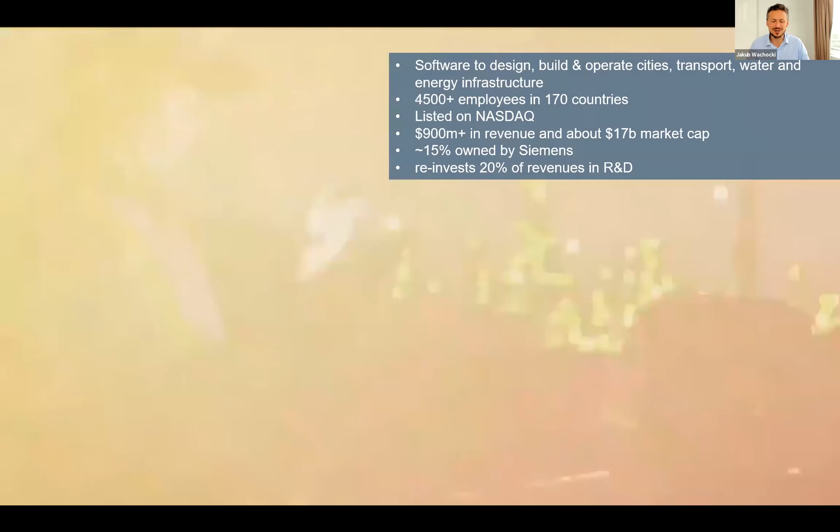So a bit about myself. I'm based in Singapore, relocated here about 2 years ago. And I've been involved in a number of activities here, also with some of the government agencies, and now we are providing something that we call Success Advisory. If you don't know Bentley, we provide software solutions to engineers, architects who design, build, and also operate the infrastructure, which is sustainable and smart. We have about 4,500 employees across 170 countries.

For those who are in Singapore, I'm sure you are familiar with some of the examples with this architecture. Of course, Marina Bay Sands. As an example of a project we're involved in, we've actually been providing solutions to design the ArtScience Museum here, but also the structure for the Marina Bay Sands, also the bridge, but also the geotechnical information and simulation below ground.

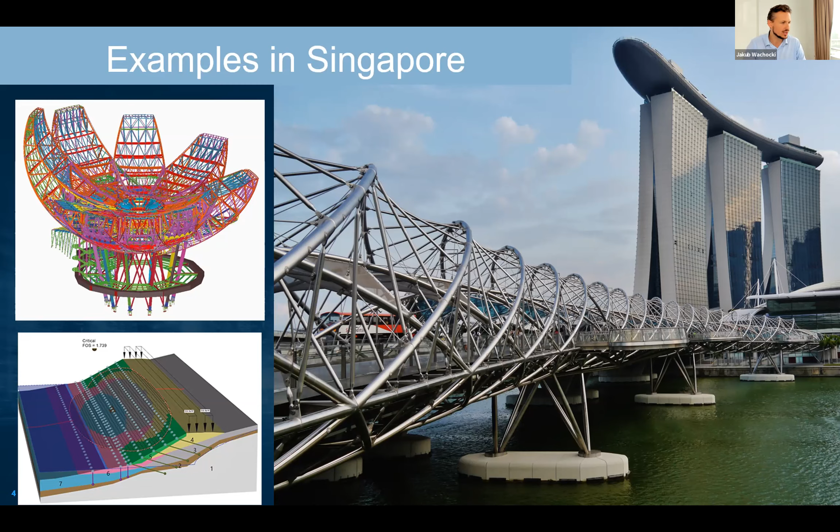So giving a bit of a context, I'm sure you personally feel that there is a certain trend that we are experiencing. More and more people are actually moving towards the cities. And therefore, there is a big pressure on the cities, right? Singapore, of course, has limited space, can go up and down, and up to 70% of people will actually live in cities going forward. But we also see that the cities are becoming digital. And today I'm going to be focusing less on the cities context, but more towards the infrastructure assets.

So what we see is that our future is, of course, smart, and I will be defining what it means precisely, but also our future is more and more open, and this is part of our strategy. We understand that, especially for the big infrastructure owners, where you're trying to combine disparate systems, disparate data sources together, whether these are IoT sensors, engineering data coming from designers, contractors, any other services, you need an open system to be able to actually harvest the data to the fullest, and also remove that lock-in that is quite a concern for many owners.

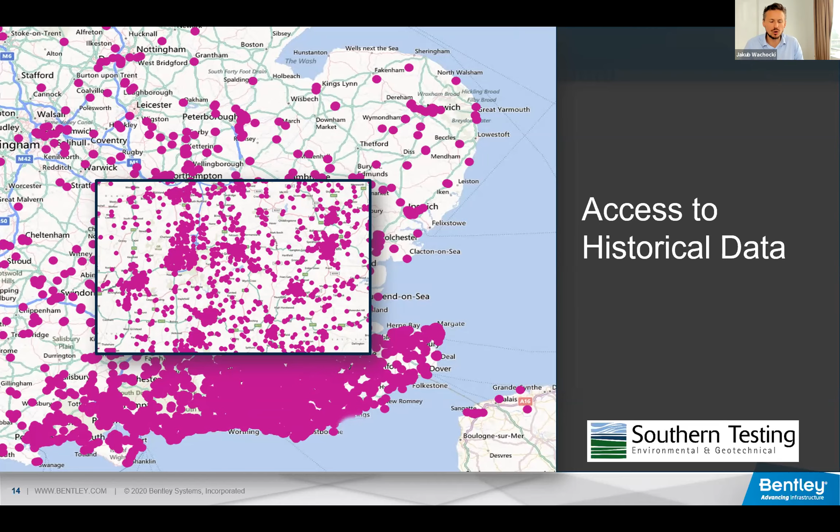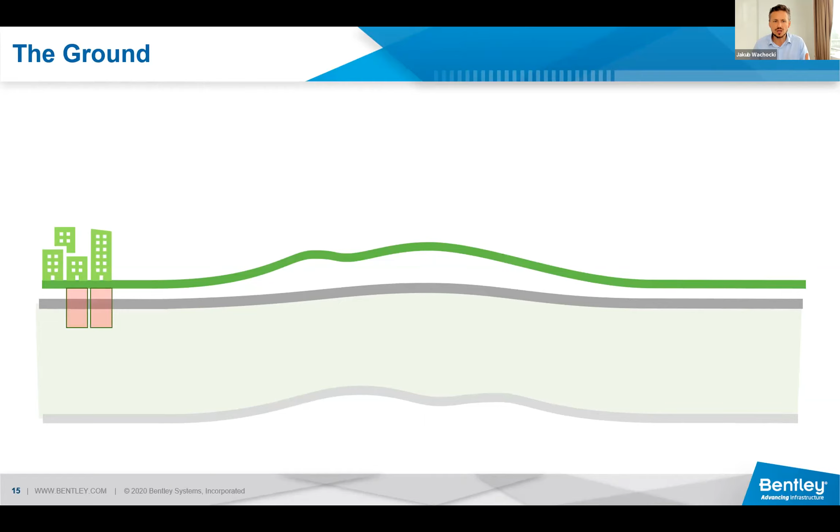Another thing to consider is that it's not just about the overground. Typically when we think about infrastructure, it might be we build a road, a rail, maybe a station, an airport, whatever it is. But what we must realize is that it's about connecting different systems that are coming from the underground assets as well. So it's both underground and overground assets because especially underground, the ground itself is being shared across the participants.

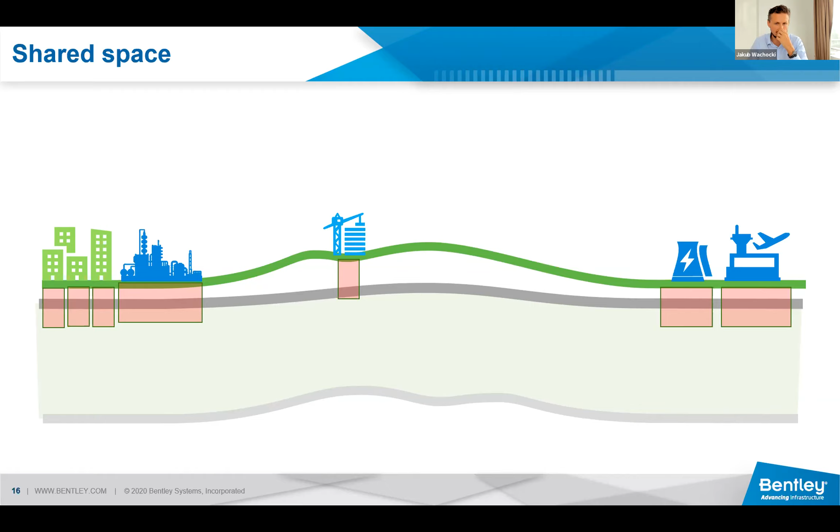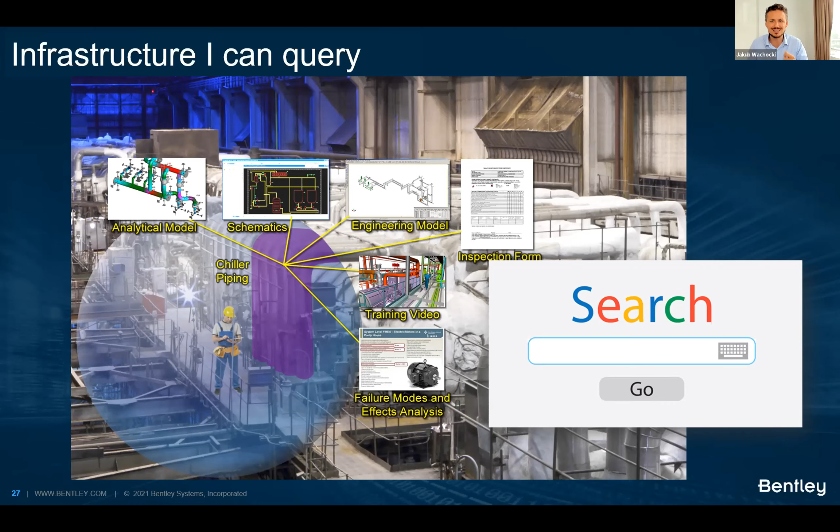So what is smart infrastructure in general? How would I define that? Well, first of all, for me, infrastructure which is smart is an infrastructure that I can query - it's the ability to find things. Here you have an example of an inspection engineer who is able to access information anytime, anywhere, or even contextually.

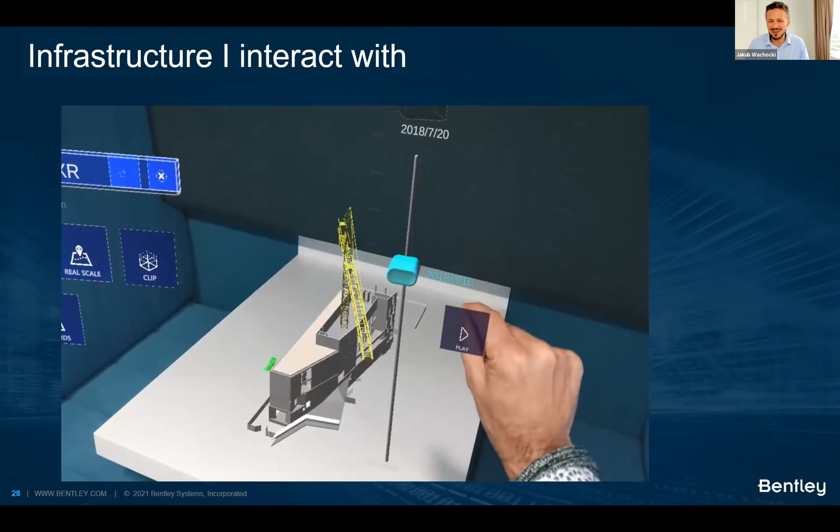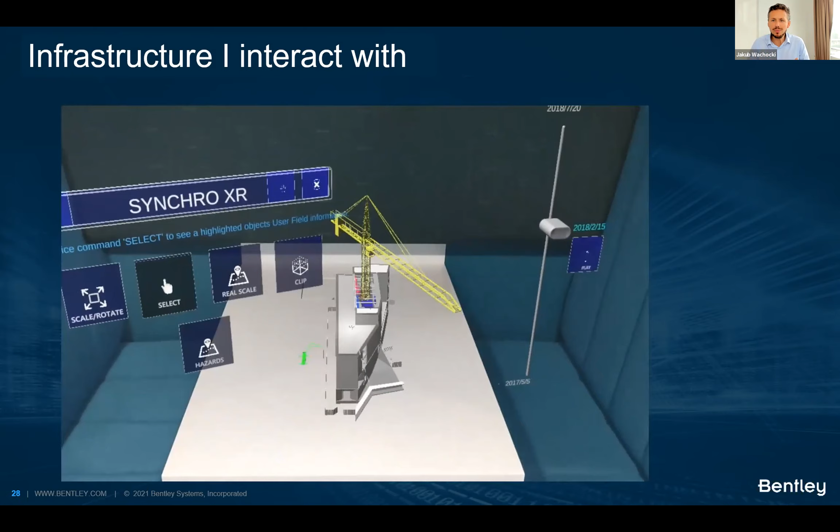But it's also the ability to interact with things, with infrastructure assets. Here you have an example of augmented reality technology - you're able to interact, visualize, comment, understand it much better. And you can think about disparate teams coming together from different regions and working on the same asset as well.

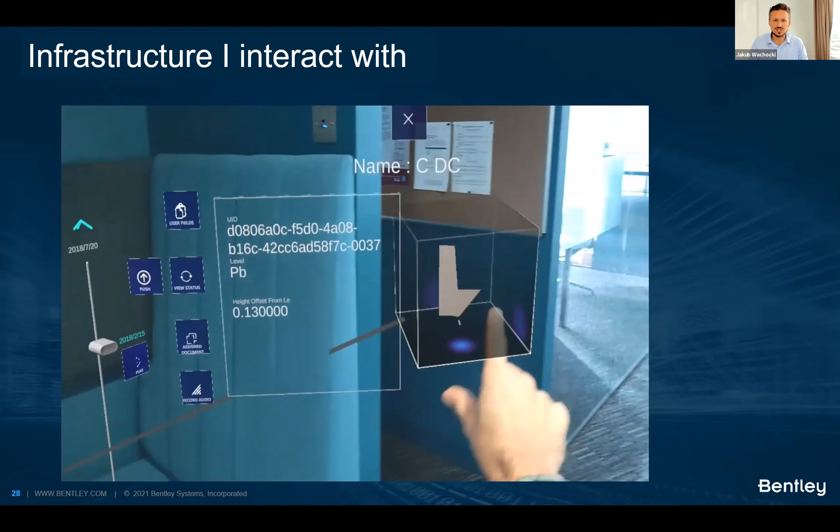But it's also potentially an infrastructure which I can talk to. Imagine being able to use voice control to interact with a twin, assuming you have that twin, have that information available. So you are able to interact with it much easier, without even handheld devices potentially.

But it's also infrastructure which I can inspect remotely. This is now, of course, possible with digital twins. In this example, we've worked with Microsoft and we're using real-time high fidelity rendering capabilities to allow multiple experts to inspect the same asset from different locations at the same time. And one of the benefits measured there is that they saved about 40% of labor cost on each inspection.

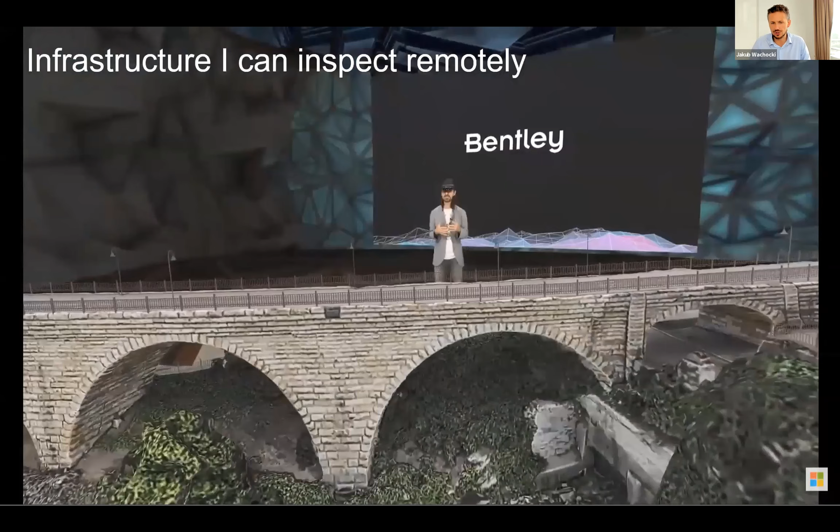Now it's also the ability to recognize things without human intervention. As the infrastructure ages - and we know that 99% of infrastructure is existing infrastructure, brownfield - how can we ensure that we can possibly find cracks, maybe recognize cracks on a bridge? Maybe we can use drones and photogrammetry scanning to do it automatically.

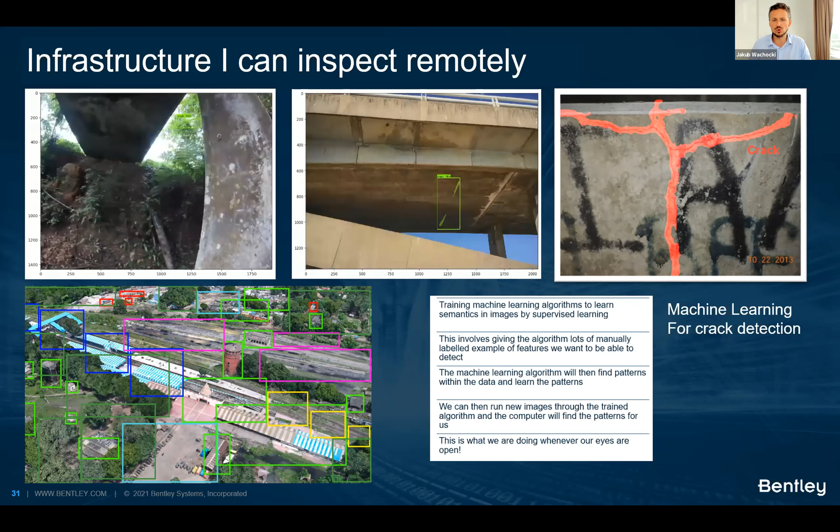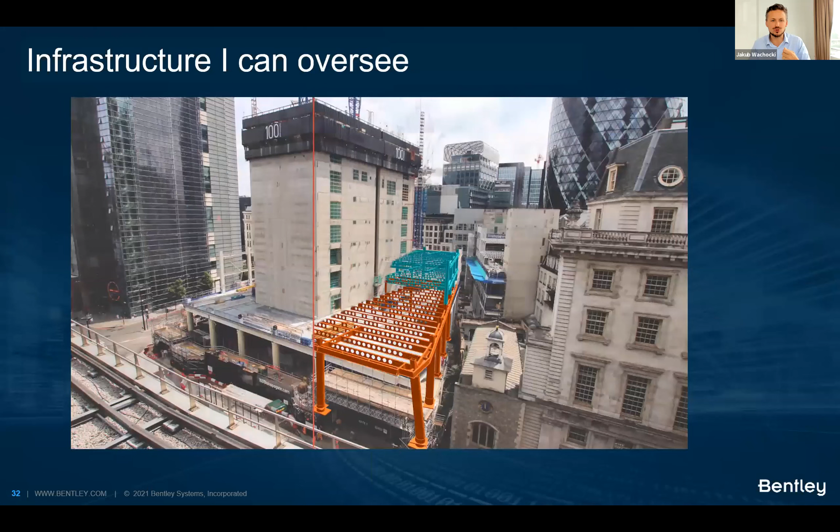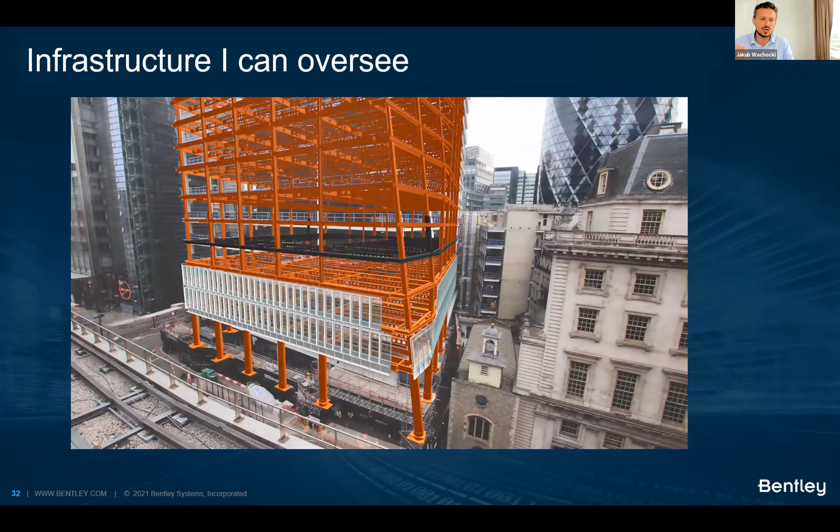But if we go back to the CapEx project delivery, what we want to do is be able to oversee the project as it actually goes through this journey. As the owner, you might want to manage your capital project expenditure, cash flow management, look at as things get erected whether you need to release payment to certain contractors or the main contractor. So this is becoming more and more critical.

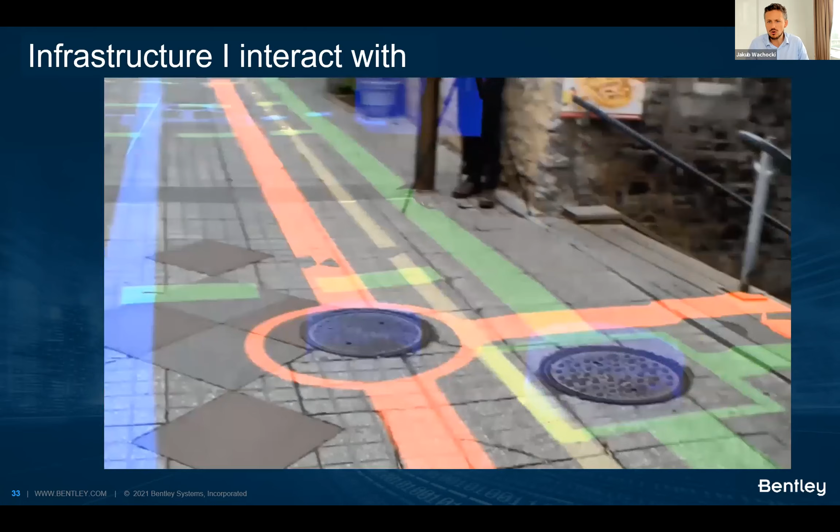And coming back to this ability to interact with things - here's another example of augmented reality technology where you can visualize, comment, and understand the infrastructure much better, whether it's interiors or exteriors. But it all comes down to being able to have that information asset available in the first place.

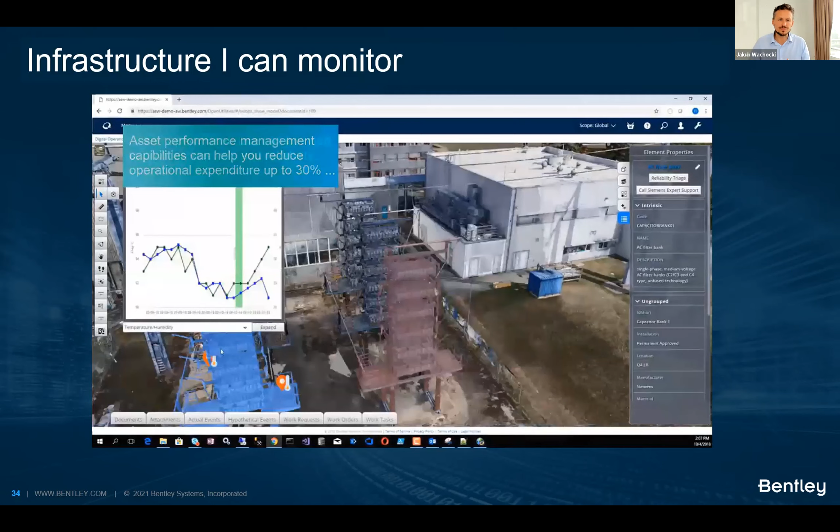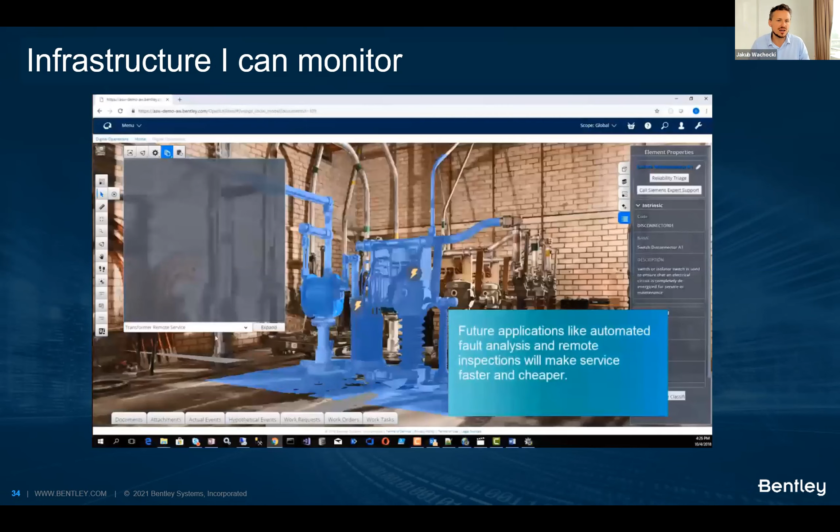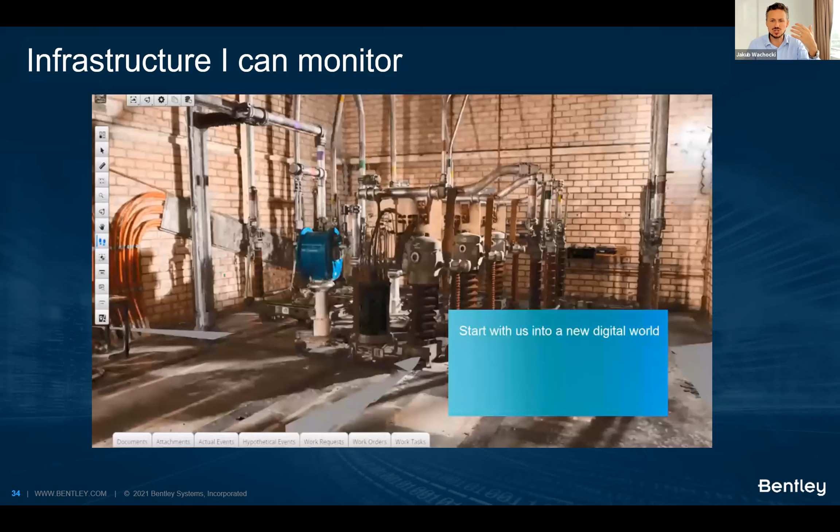Finally, there is this other capability, which is all about monitoring of infrastructure assets. This is something we co-developed with Siemens. Here you have plant infrastructure - we built a 3D model with photogrammetry, with photos, so you can create this geospatial information, mesh information, and then attach data to it. This data can be interactive, can come from sensors, and so forth.

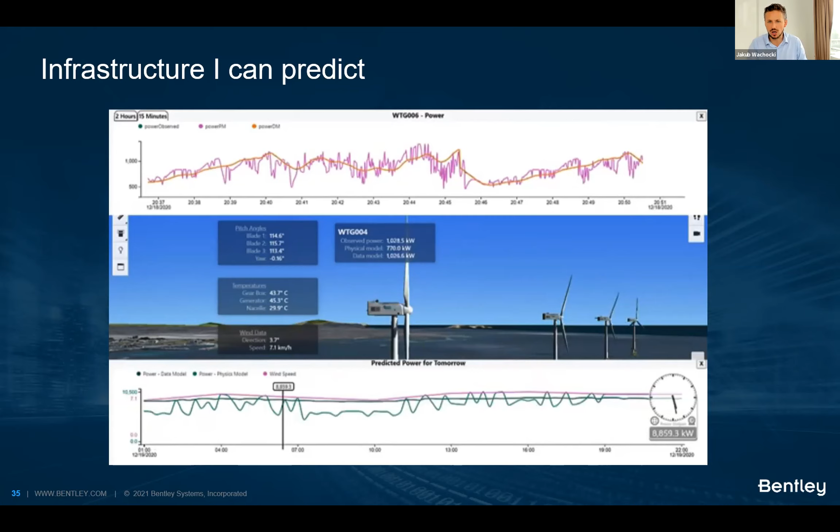Going back towards the operation side, energy management and especially green energy is something very dear to our heart. How can we predict the amount of energy a particular wind farm is going to generate? We can apply algorithms such as AI, or generally collect different data sources together to understand and predict whether we will have some downturn, or whether we need to supplement this clean energy with other energy sources to fuel our city.

Another example we've been working on with Microsoft: imagine you want to protect a particular infrastructure because you want to be able to intervene when appropriate. Maybe there's a sensor that looks into the increase in CO2 emissions or other gases, and you want to see what's actually happening. So you install live stream cameras from that particular tunnel, and then you might send help with the intervention going forward.

For those not familiar with a digital twin, I'll mention this briefly. It's about having a virtual representation of a physical asset, but this could also be a process or system. The idea is to keep this information current, so we need to continuously synchronize and survey - the decision is up to us whether this is every second, every millisecond, or every week when we're surveying and updating the infrastructure. We want to make sure this digital asset generates insights to make informed decisions.

If we come back to why digital twins are so valuable, first of all it's being able to make informed decisions and answer critical questions. What questions do we have about a particular infrastructure asset? Who is responsible for it? Where is this asset? When do certain things need to happen? So all of these are questions - once they're answered, we know how to carry out critical activities.

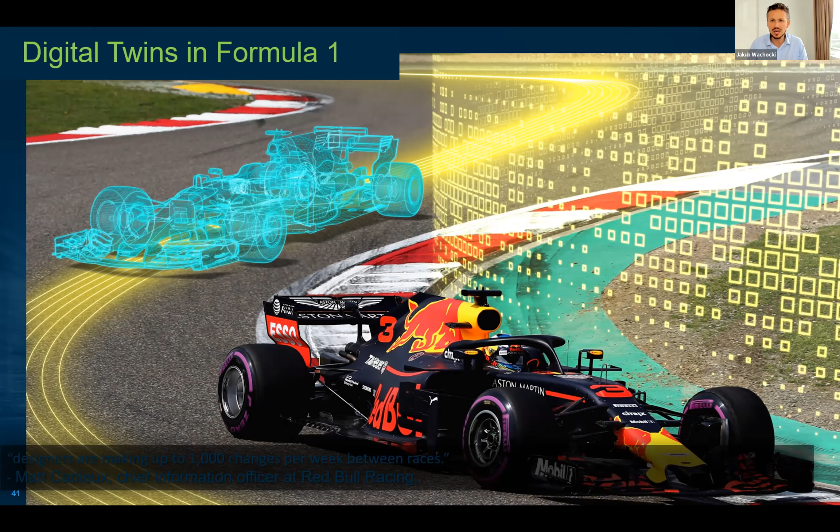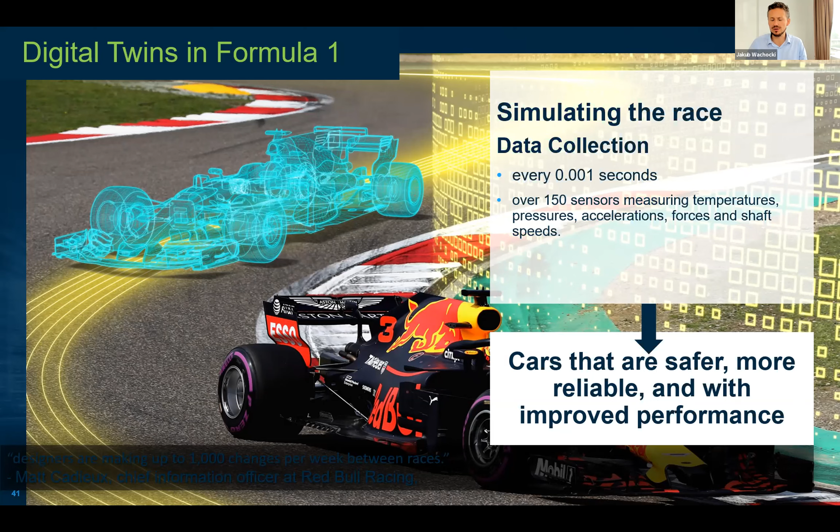Let me switch gears and show you what's happening in other industries - we can learn from other applications here. This is an example of Formula One, where teams were able to make up to 1,000 changes to the vehicle between races. How did they do that? They were simulating the race to prevent accidents, optimize car performance, redesign parts, optimize fuel consumption, and generally avoid failure. So these are the outcomes the team was trying to achieve.

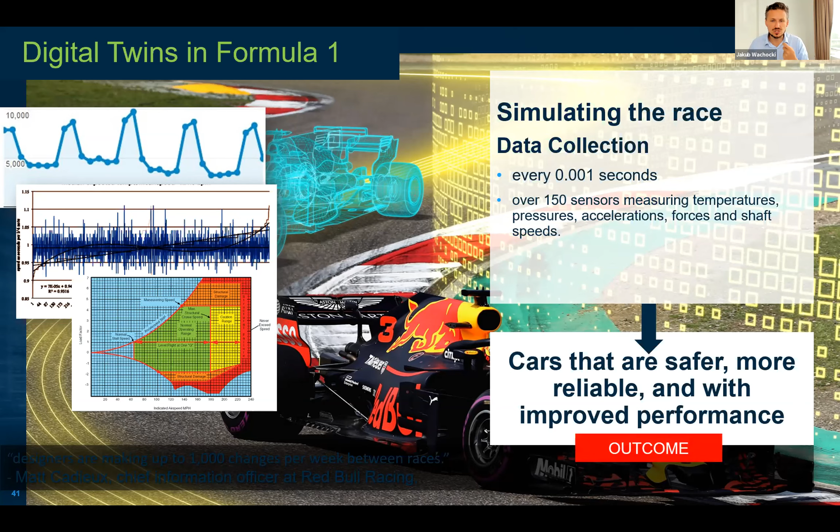This is very much applicable to the built environment, where again you collect different data sources. You want to analyze vibration patterns, aerodynamics, or whatever you name it. It's about making these improvements between races in this case - there's a focus on outcomes.

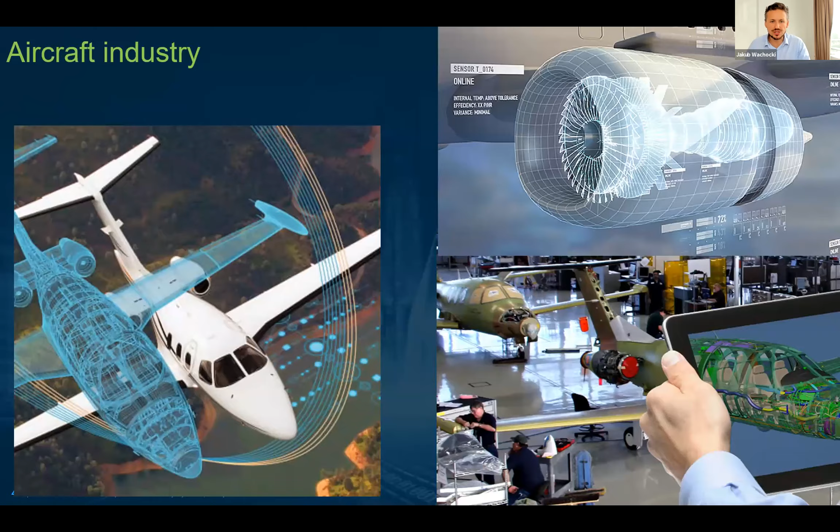Another aspect to consider comes from the aircraft industry, but now we see something similar applied to elevators in our industry: where you're not only selling the engine, but actually leasing the engine to the owner of the aircraft - in this case, Rolls-Royce to Boeing. You can see there's a different business model here, because it's becoming a subscription business model where you're subscribing to the engine service, to power by the hour - that was the model. You can see we're redefining the way we're providing value.

And of course, there are other outcomes in the built environment which we want to see, which are maybe around reducing traffic, reducing accident rate, or optimized energy performance.

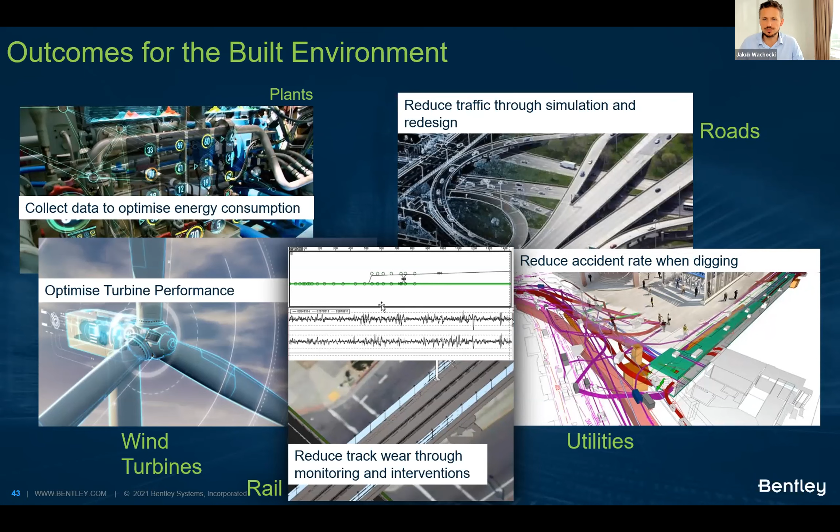When we are designing a digital strategy, typically we want to identify the various questions that we might have. For instance, in the operations space, who has the maintenance contract, what is the current energy consumption, and so forth, right? And of course, you can have a number of other questions. Maybe in the construction space, if you are building and you want a crane, what other contractors were providing this similar crane in this region?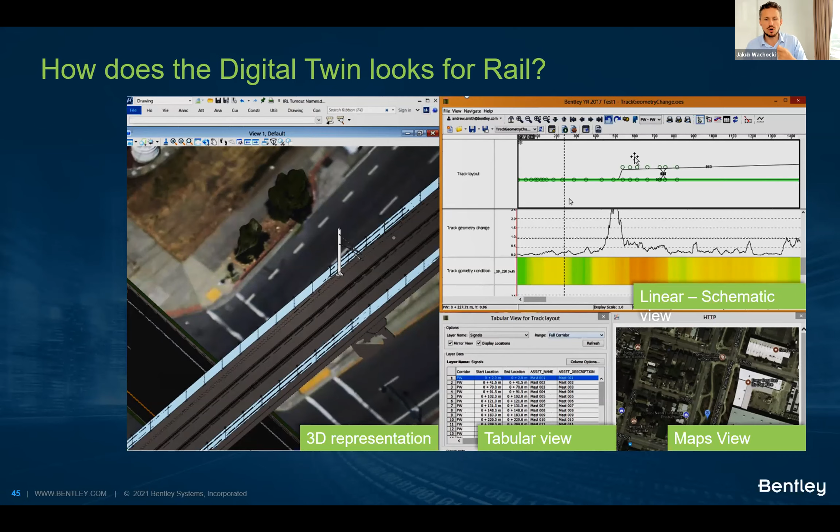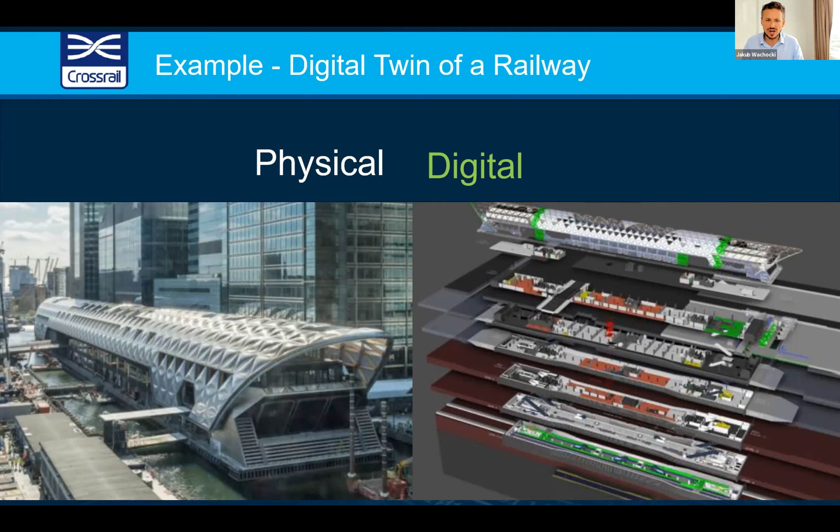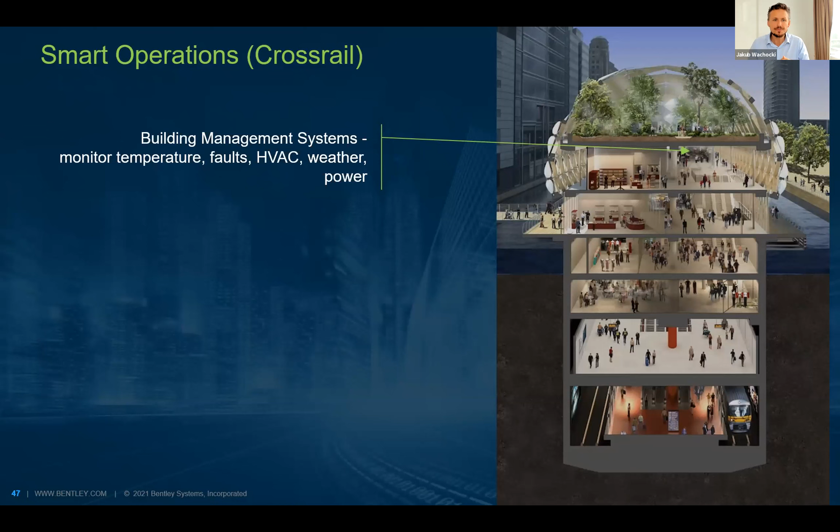I'm bringing this up because this is one of the first digital twins or digital railways in the world: Crossrail. So how did they do that? What was their need and what did they bring together? Well, they pulled together information from disparate systems, whether these are building management systems, CCTV security systems, escalators, to be able to look into a particular asset: how much energy does it consume, is it faulty, how often does it break, and then maybe you can monitor how many people throughput a day you have and so forth.

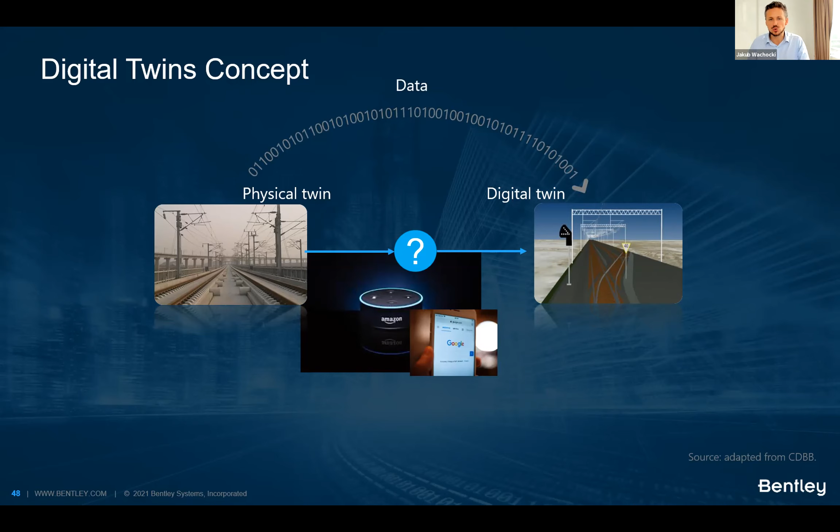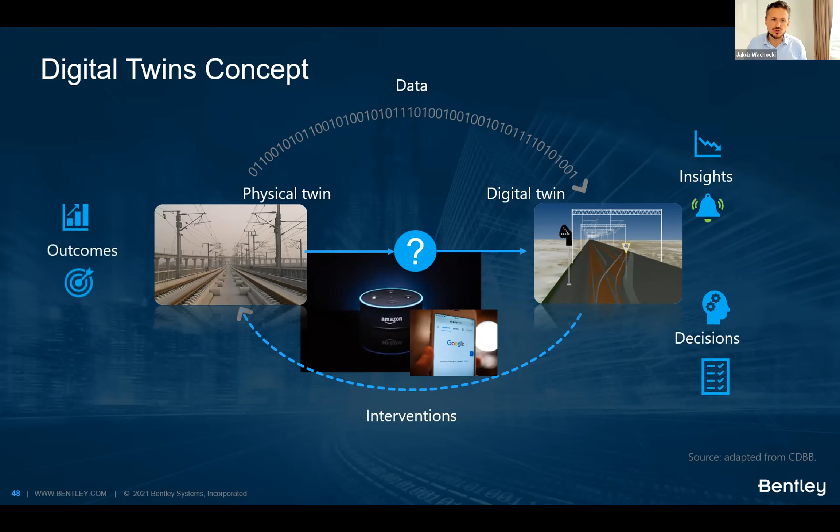So it's all about understanding, first of all, what outcomes you need, what questions you have around that, and then providing the answer around particular questions. So it's about connecting the physical twin and digital twin, having this questioning strategy, and then building the interface, right? Whether this is a voice control or other type of interface, it's all about collecting data from the physical twin and then providing insights, making decisions, and then planning for the interventions, whether these are construction interventions or operation and maintenance interventions, right? So of course, going to the outcome.

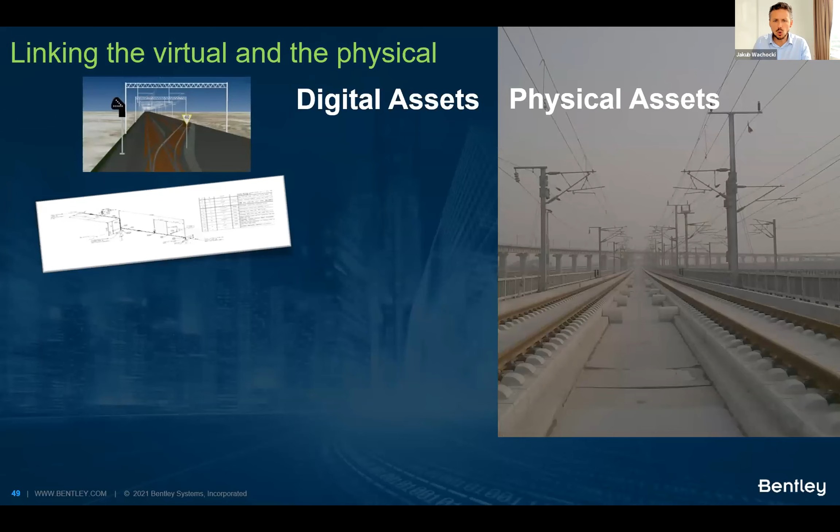And what we want to do is, of course, link the physical assets. So here you have the rail assets and then the digital assets. So what are these digital assets? Well, I was mentioning already 3D models; PDFs and documents are still digital assets. You have databases, spreadsheets, maybe vibration data coming from the rail asset. And to connect it with the physical twin, we use something we call the digital ID or asset tagging. And there is a whole world of asset tagging strategies that you can apply.

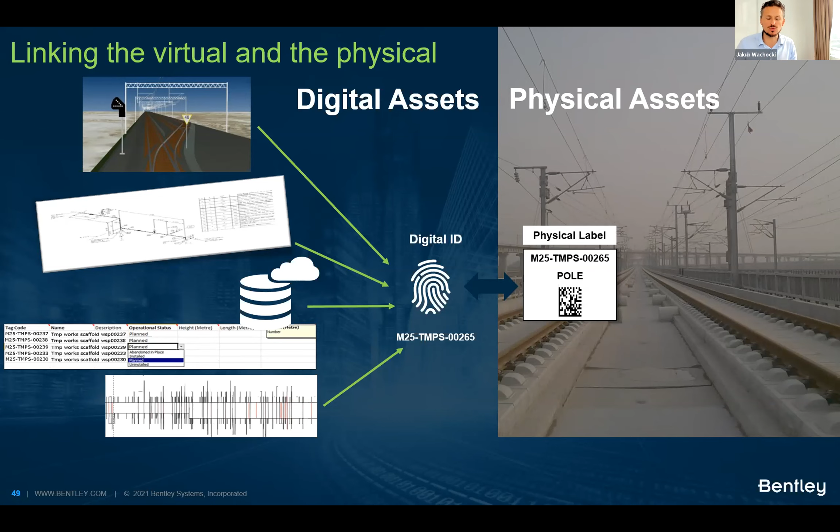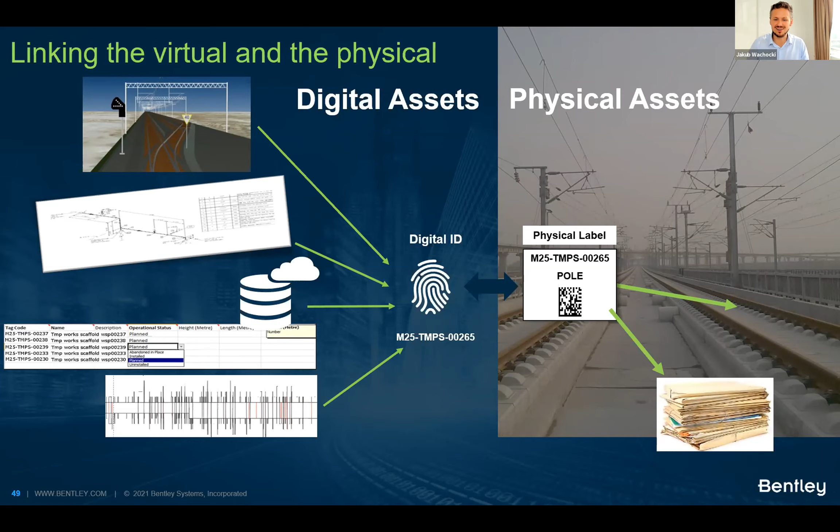But of course, we want to label the particular assets, not only the physical assets, like where there's a pole, but then also all the documentation that's physically printed. You might also connect this information together, because there will still be occasions where you want to print information, but of course that's not the direction we are going in.

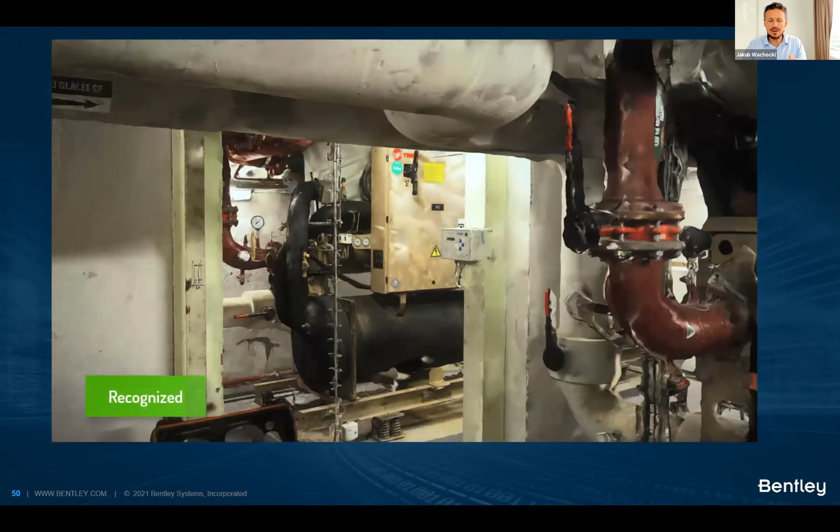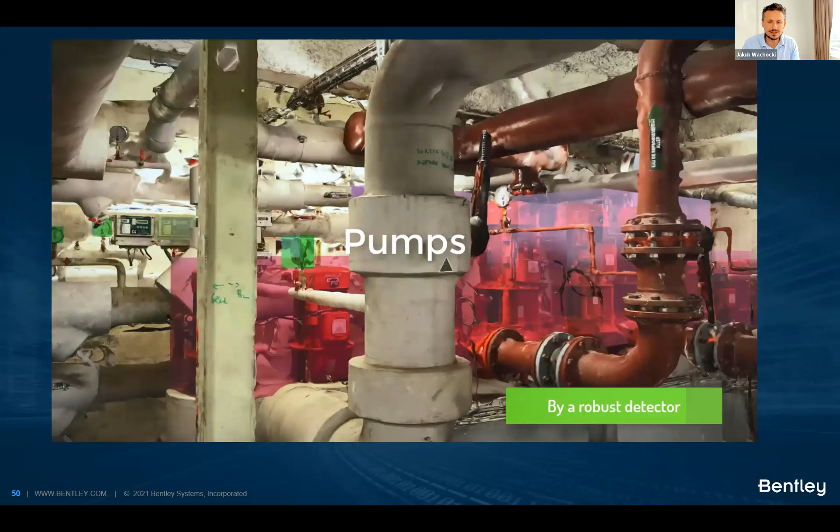So now the key problem that we see, as I mentioned before, is that 99% of assets are existing, right? So how do we create this asset registry, this repository of digital assets? So what we have been working on in Bentley is using artificial intelligence to recognize the assets.

So we bring together the technology of photogrammetry, where first of all, we took a number of camera photographs of this particular pump room. We then combine them on the cloud. The algorithms create these 3D models. And then we can apply machine learning to actually recognize these assets, and the algorithm would then classify those assets, whether this is a thermometer, whether this is a pump, and so forth.

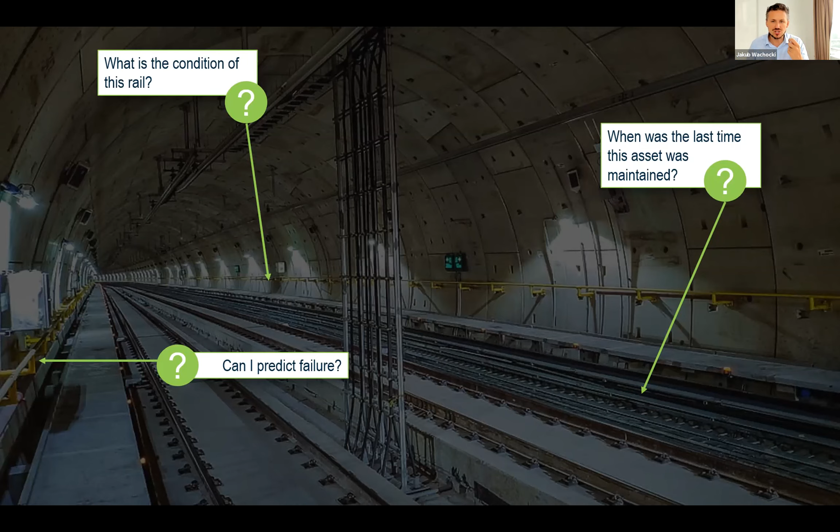And these are some of the other questions that once you do have an asset strategy, once you have an understanding of what it is, you have the questions that you want to answer, then you start to build those answers, which is the information assets. But before I conclude, let's just highlight the outcomes we are after.

So to conclude, what does it mean to have an outcome-oriented strategy? So we define the outcome. Let's say the outcome could be productivity gains, could be energy savings, quality, whatever the business outcomes that you might have. We would then specify which capabilities we need to make this outcome available. And then we potentially would look into how mature the organization is on the ladder to achieve this particular capability.

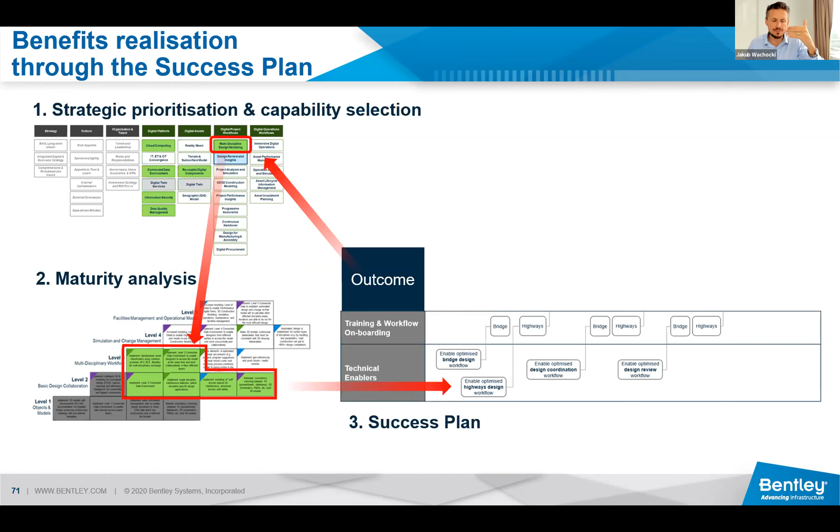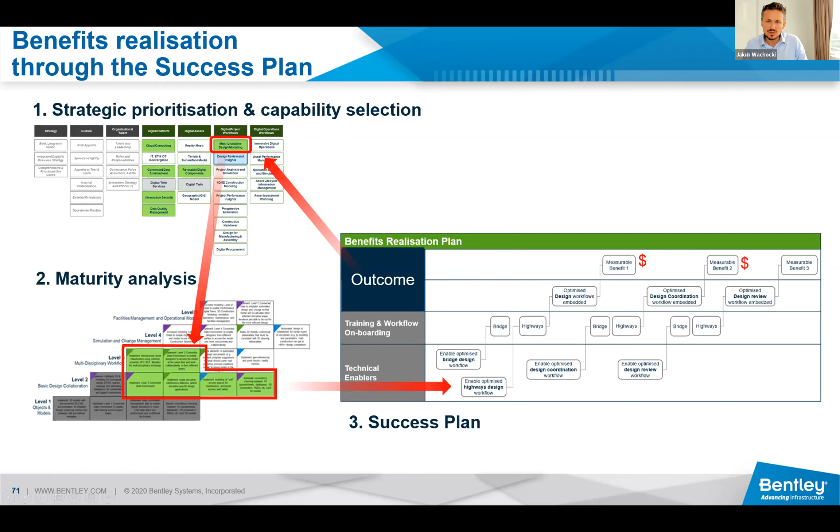And then we would look into, okay, the green ones are the ones that we need to build. And then we would build something which we called a success plan, which is a series of interventions, which are maybe configuration services, maybe it's training, maybe it's change management programs, to be able to ultimately realize the benefits. So, let me just maybe skip this slide here.

So some final thoughts before I give voice to Keith. So first of all, the general recommendation is really to start building this data foundation now, right? So no analytics capability can be built if you don't have that understanding of what data you need, which outcomes you are trying to achieve.

So build the data foundation, ensuring that your data is in the right format, is accessible. Ideally, you're bringing this data together in an open format. Another thing is to ensure that you align your digital strategy, whatever it is, whether you have a strategy to maybe put together a connected data environment, but then how does it align with your business strategy, which is maybe win more work or provide better performance of my asset.

And finally, do not forget, technology only plays a part. It's all about behavioral change, about people actually adopting these new capabilities in business as usual.

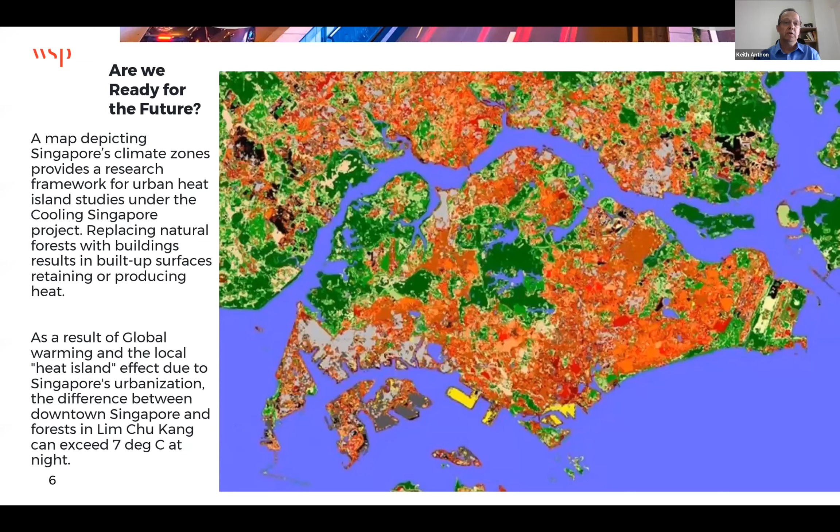Why do we need to look at the future? Are you ready for the future? I guess many of you can recognize Singapore there. This is a heat map of Singapore showing the difference in temperature, but it will also show how the temperature is rising in the future, digitally mapping this temperature rise and the effects it has on our services, whether it be the rail networks or the utility lines.

This increase in temperature will require an increase in maintenance. And having these utilities and these infrastructure services digitally linked will enable us to have better control over what is happening.

Again, this is Singapore, but I guess everybody heard the news in China with the flooding in the subway system. If there was a digital twin of the subway system, could this have helped, could it have saved the people? It probably could have, if the sensors were there and the system was set up correctly. They would have been able to get enough early warning to get people out in time. But it's all a matter of having the right information in the right place at the right time to predict these effects.

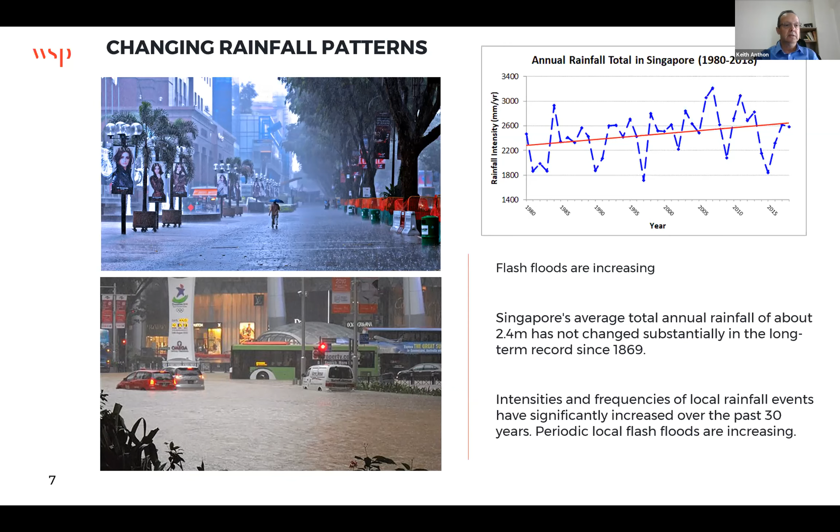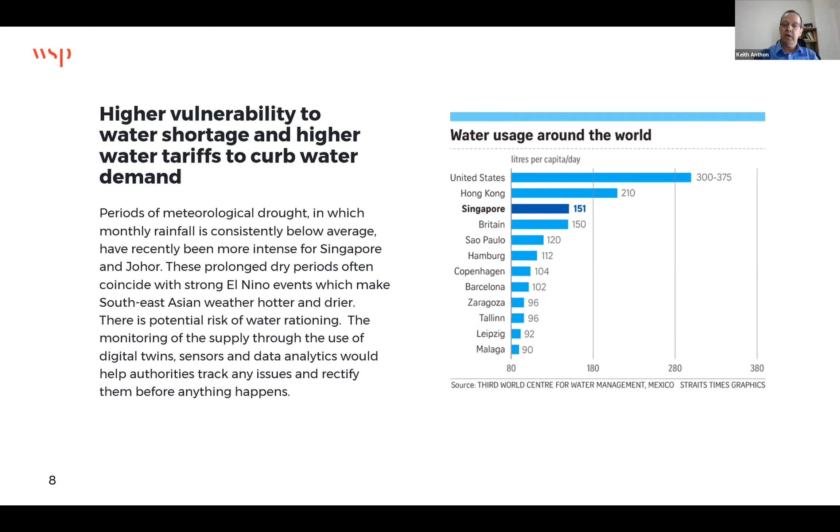But going on to digital twins, as we're talking about in this seminar, what are digital twins? What are the daily activities? Many organizations think a digital twin is your 3D BIM model. That's not really your digital twin. Sure, that's the start of the digital twin. It's used on the project planning, the conceptual design, assessing the design throughout all the project life cycles.

This may not be in order as I put there, but a digital twin during the construction can be used for stakeholder engagement or prior to construction. It can be used for doing alternatives. It can be used for cost estimating, for construction proofing, maintainability and constructability proofing. So there's a lot of uses for the initial digital twin, but many owner operators forget the last three: maintenance and asset management, optimizing operations through data analysis, and of course, rehab and future replacement.

But I would say many owner operators are starting to wake up to this. I would say it's often because manpower is becoming short, especially here. It's getting more and more difficult to get people to maintain your products. So being able to do it digitally and to be able to track your assets digitally is much better.

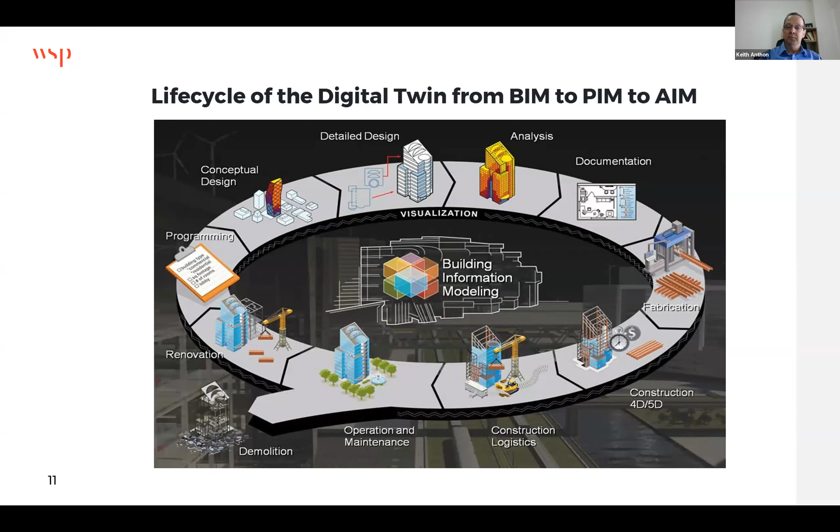Again, I came through the digital twin life cycles, the conceptual planning, through to the design, through to the analysis of the models, and construction. And often in construction, the digital twin or the 3D BIM model is used just to produce the sheets, but it's often not used in stakeholder engagement. It's often not used in material takeoffs and quantities, in 4D sequencing, visualizing through AR and VR how something should be erected or assembled, or using it for DFMA, for health and safety, for logistics. I know of projects that have saved millions using this for logistics by optimizing their crane usage.

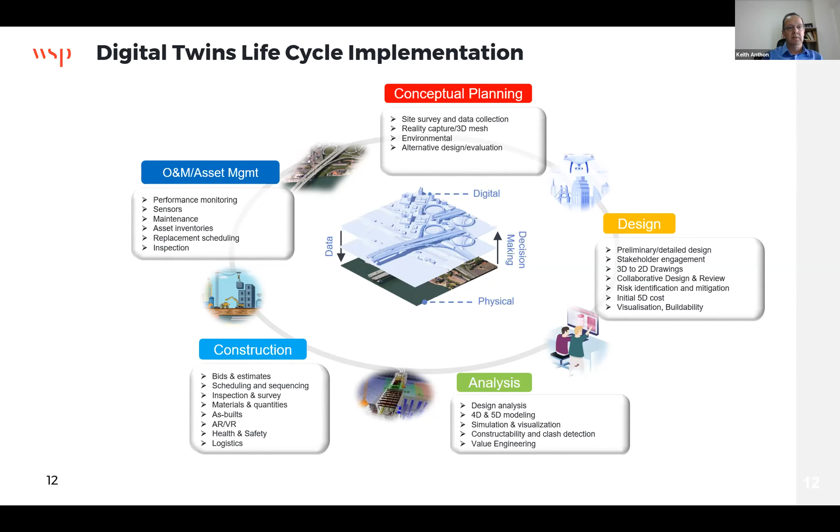I think it's becoming more and more commonplace here, but still something that needs to be encouraged. But hopefully going forward, they will realize the use of digital twins in asset management, and how you can optimize your buildings, your infrastructure, your services, your road usage, your rail usage, your airports, wayfinding, all through your digital twin and your sensors. As Jakub also explained, the digital twin supports decision-making on your project, on your assets, how you maintain it, how you run it, how often, what needs to be changed when.

In the past, or even up to now, most people rely on corrective maintenance. So when your asset breaks down, you go out and repair it, and this often results in downtime. You lose your business, you lose income. Then there are others who use preventive maintenance, who know that the asset has a certain life cycle, or that bolt, or that valve, or that rail, or that sleeper has a certain lifetime, and after so many hours it has to be changed. But actually that item may still have a lot more hours in it. It may not be worn.

So this is where your digital twin, using predictive maintenance with IoT and machine learning, learns about how long that section of rail might last, that sleeper might last, learning that you don't need to change it every 1,000 hours. It can be 2,000 hours before you need to change it. That approach will save operators a lot of money in the future.

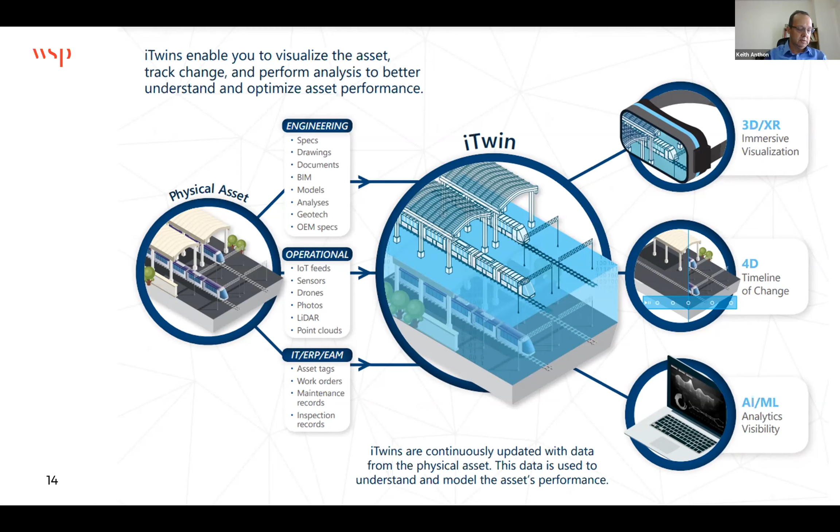The intelligence and the information that you get from this iTwin, and the ability to have a huge amount of data in the cloud and not on somebody's computer, which with the restrictions of storage space, has helped tremendously on some very, very large projects, also over very long lifespans.

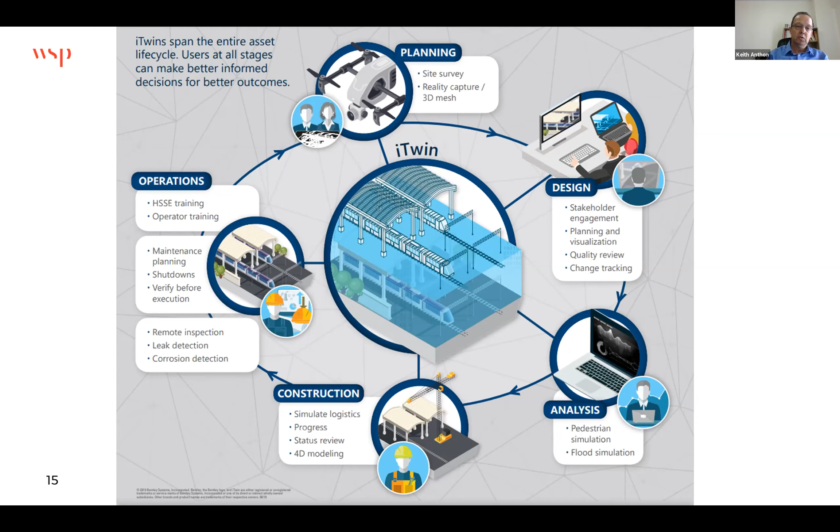We're also working with multiple rail providers in the US. Actually, I would say 5 or 6 major providers in the US with Bentley, and also with other consultants developing their digital twins of all their assets.

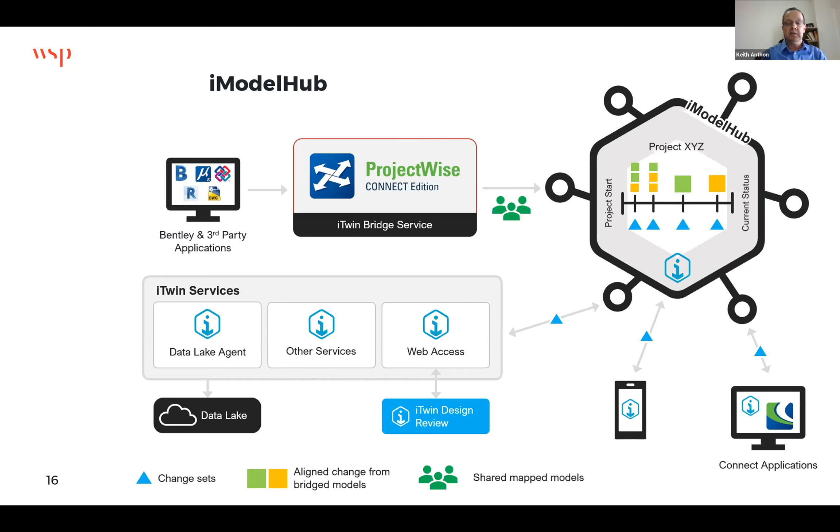This is just a connection of the iModel Hub with the digital twin and the different packets with the information coming between the different softwares and assets.

Again, one of the things Jakub said is that there's multiple different sources of information coming into this digital twin. It's not just one source. There's multiple bits of information coming from different places, and it all has to come together out of its individual silos.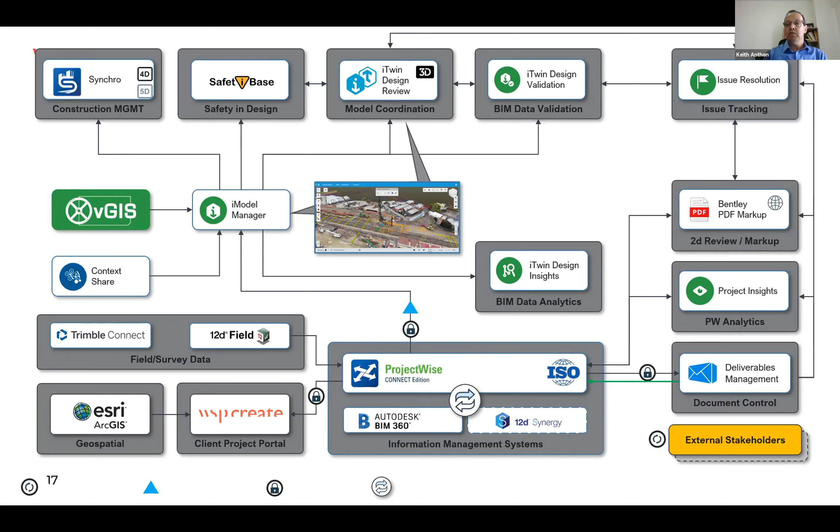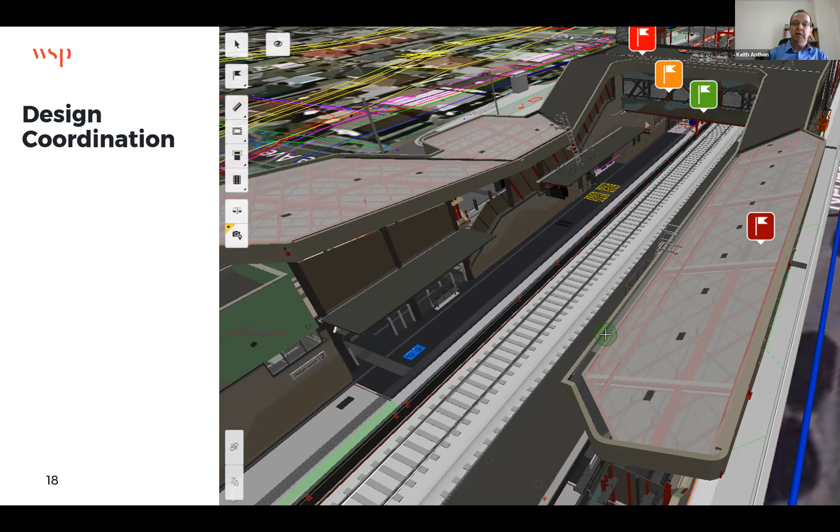And going forward, you will see that I think one of the silos during construction would be, of course, the design coordination, and that information has to flow between the different design parties, has to flow between maybe the suppliers or the owner operator, and through the digital twin, they're able to see that.

Going back to the silos, some of you may have seen this presentation from Bentley previously, I think it was about a year ago. The consequences of the silos.

Often you have, especially on rail projects, or even on building projects, multiple different stakeholders working on repairing. One person may be repairing the tracks, another person repairing the signals, another person repairing the sleepers, or another person putting down bedding, something else. You've got so many people, but they don't talk to each other. They don't look at the cause and effect, why something failed.

But bringing this information all together and analyzing it, bringing it out of its silos, so you have these silos all coming together. And once all that information comes together, you can analyze it, find out what is the cause and effect of any failure, or of most failures, and then plan for it in the future and look at how to improve on those failures.

Sorry, I'm losing my voice here. Excuse me.

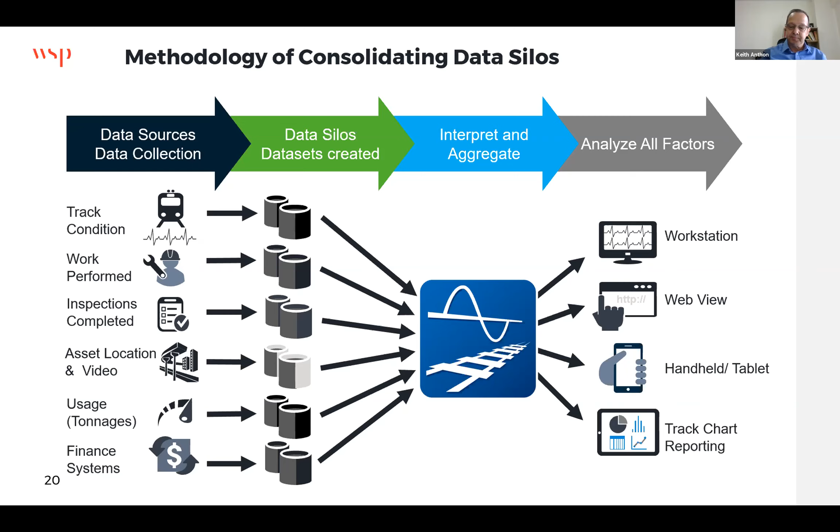So I'm just going on some of the linear track digital twins. There are so many things on the digital twins. When you've got sensors there, you've got sensors on the rail trying to pick up information, sensors on the carriages as they go past, picking up the sound. You've got sonic sensors picking up the sound of the tracks.

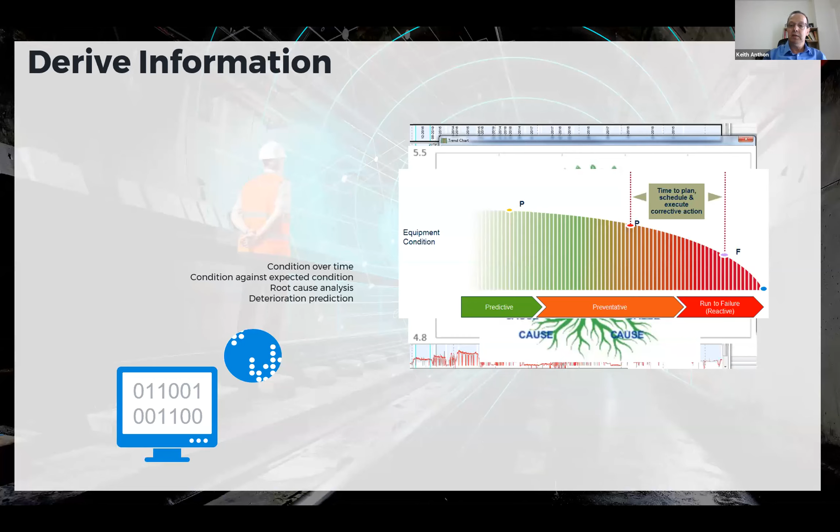You've got scanners going across, and all these are much easier than using a human walking along the track as they used to do in the old days, or on his little buggy going along the track, trying to see if there's any cracks or any deformation. By doing this all remotely and collecting all this data real time, that's really saving a lot of operators a lot of money.

The thing is, when the data comes in, as you can see in the middle there, there's a lot of noise in this data. So this noise has to be ironed out.

And this is looking at the tracks and the deformation of the tracks, and what is the track's life still available. With a reading every 200 meters, you're able to assess the tracks.

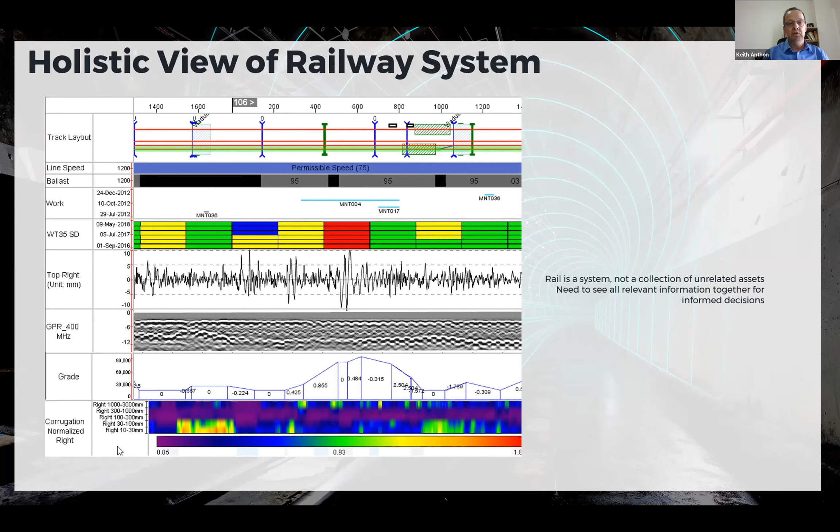You'd see here, of course, the heat map: the red area is showing that there's issues in your tracks, and the green area is showing that the tracks have still got good lifespan. The orange is where you should start thinking about when you're going to replace those tracks.

So this is, of course, again, Bentley working together with a number of other people and a number of rail operators in the US.

Again, looking at the tracks, being able to do the right work, the right time, the right place, and knowing when you're going to be able to maintain something and planning your maintenance rather than letting it fail and then you do the maintenance, or fail and an accident happens. This gives you happier customers and a better return of income.

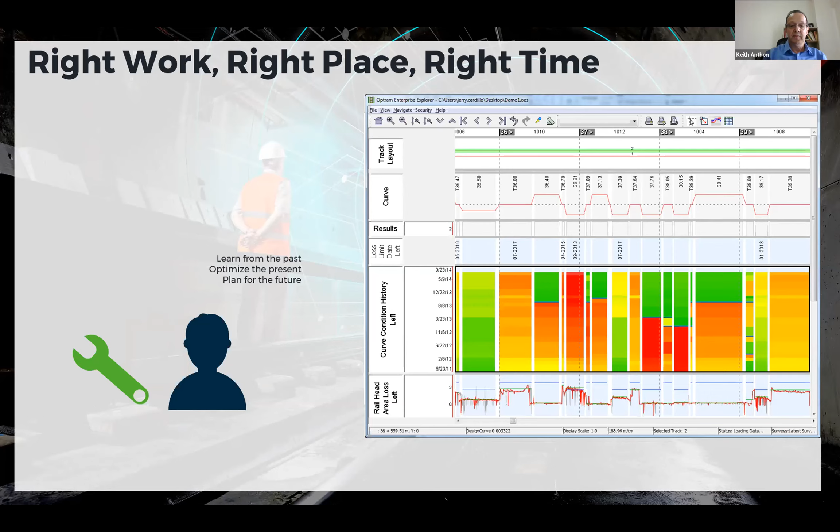Then, of course, what I spoke about earlier on was, this is not only in rail, road digital twins, but also in utilities such as water supply. Being able to use software and sensors on your water supply to actually see how your water usage is. Have a look and see if there's any leaks coming up. Being able to shut off the system immediately. Being able to visualize what is happening where on your digital twin. It's all something that helps you tremendously in maintaining your assets and maintaining the life cycle of your assets.

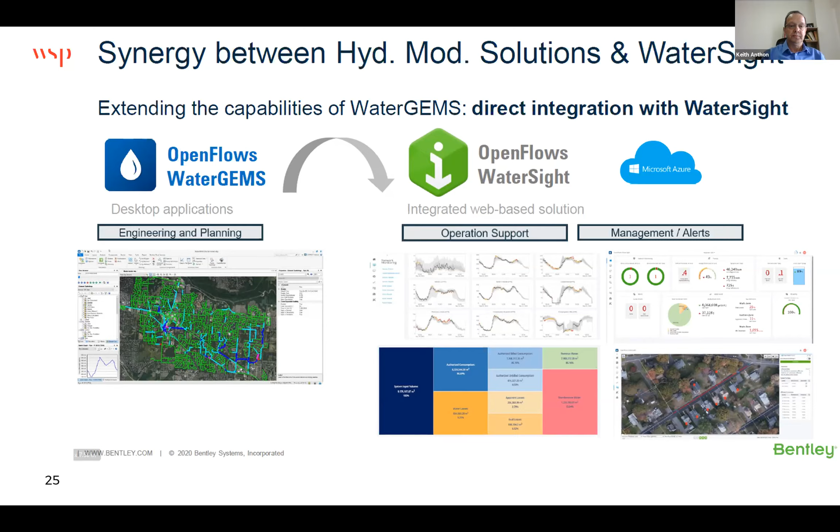All this information coming into your digital twin, your network monitoring, your pumps, your tank performance, alerts from any breakages or sensors where there's a differential flow. You might have one flow going on one side of the sensor and then the flow is dropped on the other side, so it means there's a leak there. And being able to respond to it before the leak gets too big.

Recently, I asked the owner of my property or the management of my property, has there been a change in our water bill for the property? The person said no. But when I called the utility company to come and have a look, they said, there's a leak in your main line here on the property. So it's strange that the actual owner could not see the leak in his own property, but the utility company came and actually saw there was a leak, and so it was able to get fixed. But in 4 months, there's a lot of water that got lost, and it took 4 months to convince the owner that water is precious.

So as I also said, we work also on a lot of intelligent transport systems. A lot of these ITS systems are still not digital twins, but as you know, with the Digital Britain, these will all be digital twins in the next 1 or 2 years, probably within the next year. They're asking to digitize all their roadway networks to use these ITS systems. This is in China, where we do a lot of ITS systems here in Asia as well.

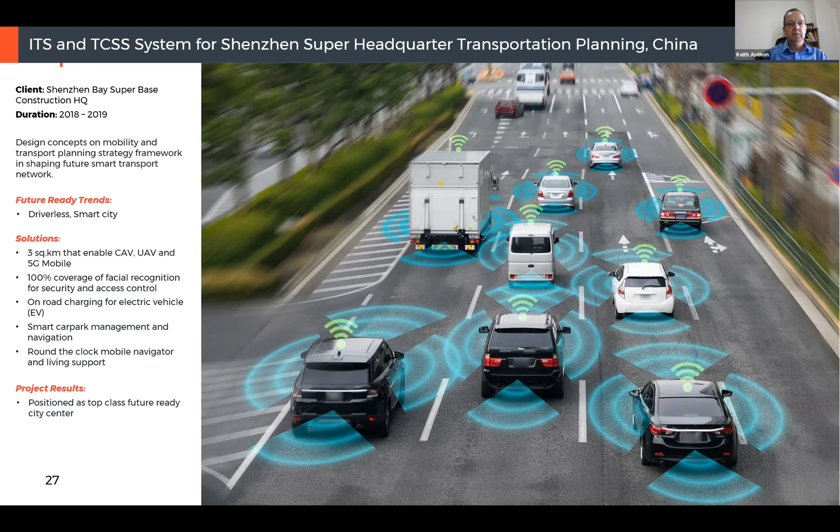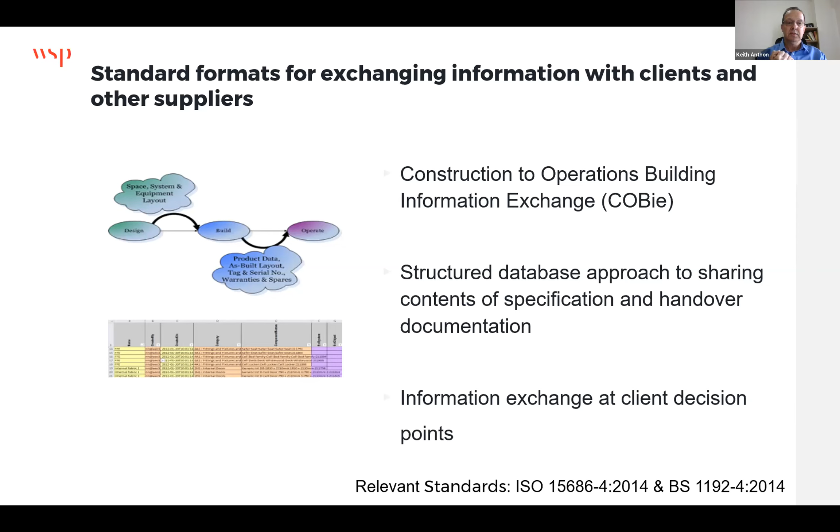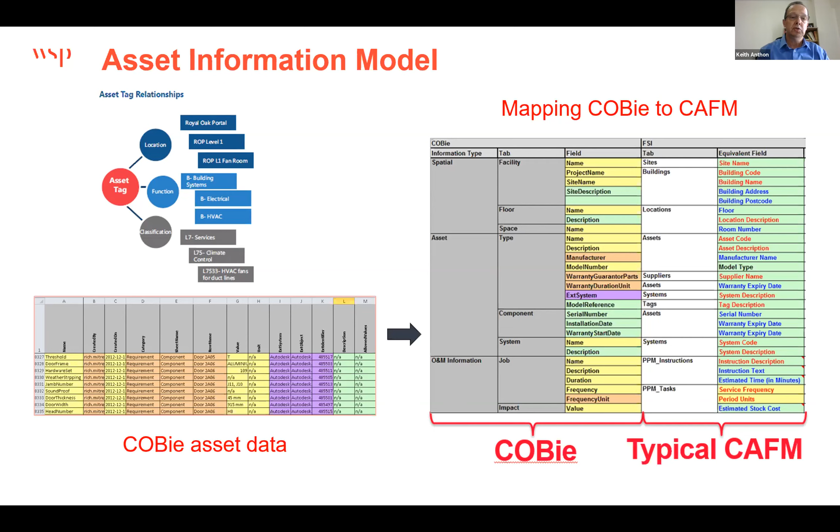Then just a couple of minutes, I will close out just to give you, as Jakob said, digital twins and data. There's a lot of data going back. You need to know what data you want to capture and where you want to put the sensors. What is the best thing? It's always better to start small and work your way up. Don't try to do everything at once. It will fail, and always have a plan in place. You've got your asset tags on your assets, you've got your asset tags on your sensors, and all that is talking to your digital twin, and they should be talking to each other at all times.

And of course, there's a lot of IoT and technology behind the digital twin, bringing all that data together, being able to analyze it, give the right information out, put the right information back in to tell it to do something if you're telling it remotely to do something. All that information has to be built up and made sense of. And as I said, it's big data.

For some of the rail services, they actually transmit the data of their rolling stock to a receiver station every time the rolling stock goes by. And one day's data may be around, I'm not sure, 2 gigabytes, 2 terabytes, but there's a lot of data. I think it's 2 gigabytes of data a day, which will be transmitted to their control center every day on their rolling stock. And that data may not only be about the train, but will also be data about the tracks.

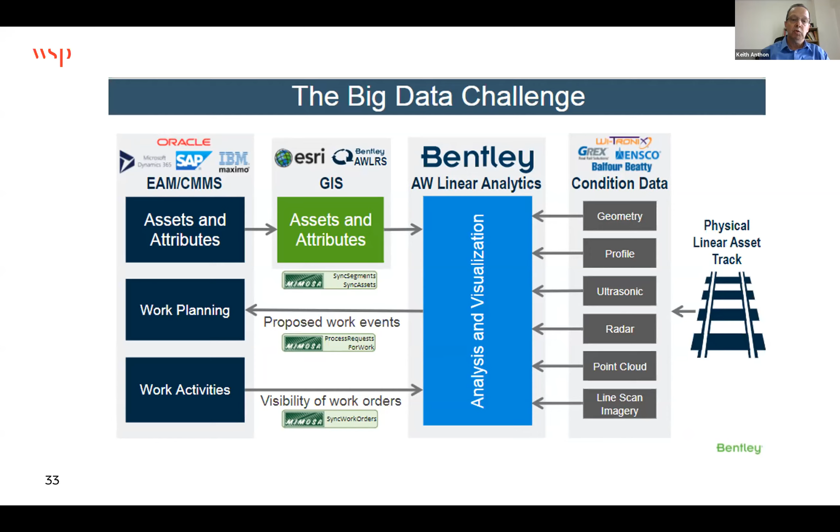And we all know with the attacks today, cybersecurity is a big thing. This is something you have to look at. It's one of the biggest risks in digital twins, but we're getting better at security, and attackers are getting better at attacking. So it's a continuous fight, and I guess that fight will be there for many years to come. We just have to live with it, like everything else, as well as the massive data, the IoT behind it, and the interoperability between the different systems.

Many governments with smart cities, and of course, many governments are looking to be carbon neutral, and this is one of the steps towards being carbon neutral.

Sorry, I went over a little bit. Jakob went over, I went over. So there's only 3 minutes now. Anybody got some questions? Thanks, everybody. Hope you're all still awake.

Thank you, Jakob. Thank you, Keith. So I think we have 2 questions right now in the chat box. The first question is from Alvin. Alvin is asking, what is the adoption of digital twin in Singapore? For example, the percentage of buildings or infrastructure that has some sort of digital twin, and if there is adoption, what is the maturity level of this adoption?